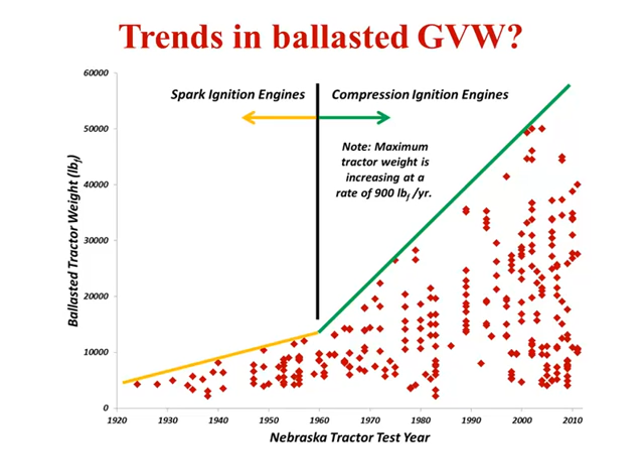We look at the rate of increase in the base weight of tractors tested at the University of Nebraska, and you notice it's a slowly increasing rate right here. What happens in 1960? It takes off. What happened between the 20s through the 60s and 60s on? We went from spark ignition engines, kerosene burners if you will, to diesel.

Look what's happened. Now I'm suggesting to you that if we look at that envelope, the heaviest tractors or the highest horsepower tractors built by John Deere have increased an average of 900 pounds of mass per year, sustained for 50 years. Is anything going to stop that trend? I just showed you a 632 horsepower tractor. Is anything stopping that trend?

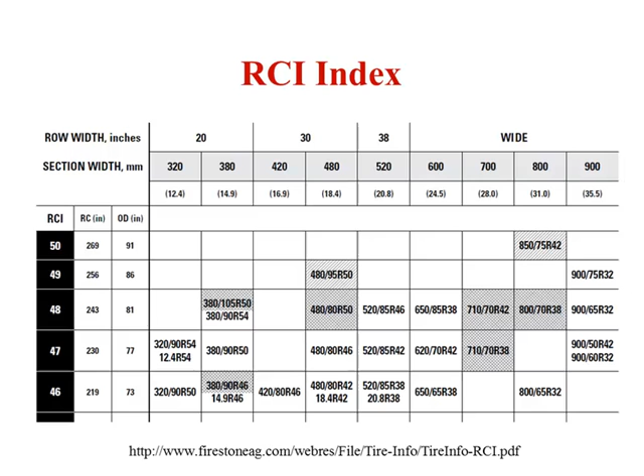Again, is tractor size going to stop increasing? I was up at Firestone Tire - I got to remember it, yeah, hopefully you got the right one. Sometimes I put a lot of different PowerPoints on there, but I was up at Firestone and they were talking about this RCI index, and one of the engineers kind of slipped a little bit and said they're going to build a tire with an RCI 52.

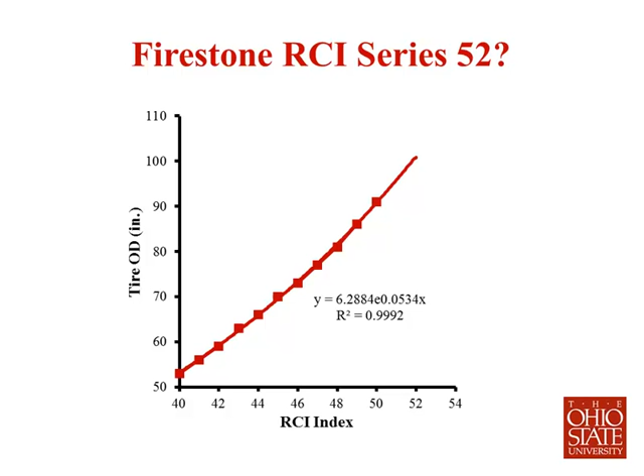I'm an engineer and I get excited about numbers like this, and the RCI doesn't mean a whole lot to you - it's a rolling circumference index, used to match up tires on tractors with front wheel assist. I can go into the technical aspects of it, but he said 52. So I came back and I graphed this - this is the tire outside diameter, and this is the RCI index, and this is what's currently manufactured. They go up to a 50. Now they're going to a 52.

We go up there and hit that and come across - we're going to see a row crop tire. When I say a row crop tire, the width of the tire will fit down between 2 rows of corn. We're going to see a row crop tire 100 inches in diameter. Anybody got a feel for that?

Somebody's getting ready to build a 750 horse tractor. Why would Firestone be building a tire 100 inches in diameter for a row crop application? Somebody's getting ready to build a tractor, 750 horse.

700 horse, I want you to do the math, 120 to 130 pounds of tractor mass per engine horsepower. And how heavy is that tractor? 85,000 pounds? What's the limit for moving goods and services on public highways in the state of Ohio? 80,000 pounds?

How are you going to haul that thing? You can get wide load permits or oversized load permits, but think about that. This is today, I'm not talking about something that's futuristic. This is today. Combines.

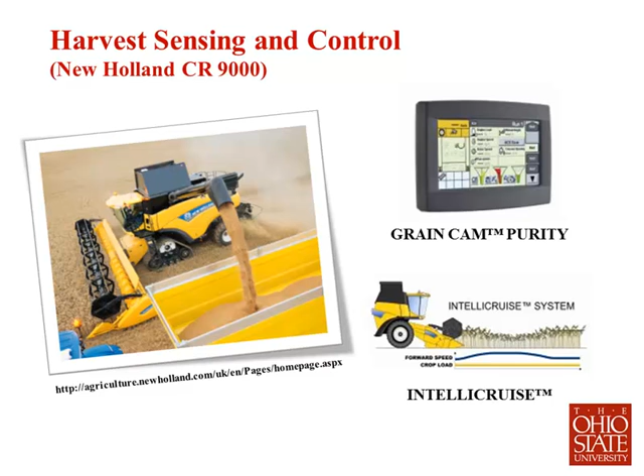One of the things I didn't mention - there was a gentleman from Purdue, one of your counterparts, Howard Doster. You remember that guy? Great man, isn't he? Howard Doster used to talk about farming in combine units. In other words, you got to farm enough ground to cash flow. If you're going to buy a new combine, you're going to have to farm enough ground to cash flow that machine. Howard Doster used to talk about farming in combine units of 3,000 acres. That's when you had Class 7 machines.

You get to a Class 9 machine, how many acres do you need? 4,000, 4,500, 5,000? Think about this. So if you buy a second machine, how many acres do you need? Combine units, okay?

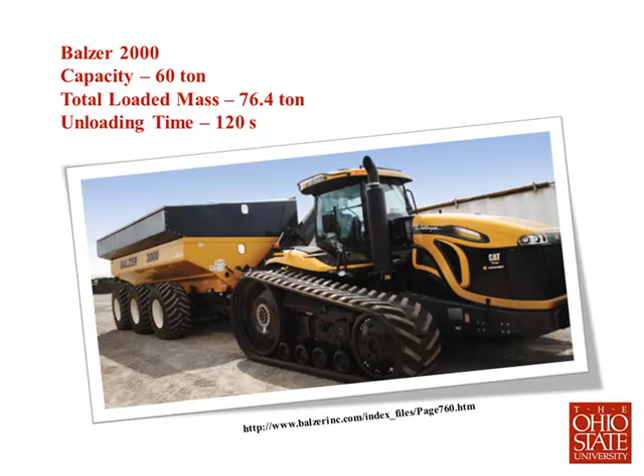When I look at this, can a farmer - let's say this automated control system that's coming, they're all working on it - what's a new combine cost? Anybody had anybody in to borrow some money on a new combine? Oh wait, they're just paying cash these days, aren't they?

You'd get $500,000 tied up in one of these machines pretty quickly if you buy a couple heads for it, a new machine. Let's say this system that's coming costs, round number, $50,000, and it reduces harvest loss by 1%.

Can the farmer afford to pay for that system? Let's see, 1% of $25,000 an hour. How long would it take you to recoup $50,000? A couple of years? All I'm saying is we're going to do things with technology because it's affordable to do so. And as the size of the machine increases, the last thing you want is a human operator making a mistake, because it ends up being a very expensive mistake.

Okay? I don't know where things are going.

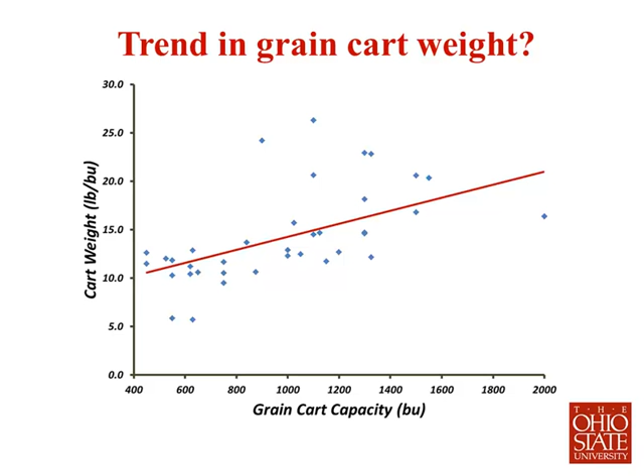Oh, hey, just get a bigger grain cart. I told you that, didn't I? There's three companies making 2,000 bushel grain carts. Think of that. You pull up to the road, you got two tractor trailers sitting there, and you fill both of them. By the way, the unload time on this is 120 seconds. You fill both tractor trailers in 2 minutes.

I was with a group of farmers, and one farmer raised his hand and said, Dr. Shearer, you can't fill 2 tractor trailers in 2 minutes with that. He said, you can unload the grain cart, you just can't get all the grain in the trucks. Think about that. Think about standing underneath the auger and somebody accidentally kicks it on. Unload time, 120 seconds. Wow.

By the way, grain carts are getting bigger necessarily. When you had a 400 bushel grain cart or gravity wagon, the steel required on a per bushel basis wasn't all that bad. But all of a sudden you get out here to 2,000 bushels, you need a lot more steel to support each bushel. So necessarily as grain carts get bigger, they get heavier.

Are we worried about compaction anymore? I submit to you, there was a really neat place: USDA had the National Soil Dynamics Research Laboratory in Auburn, Alabama. Back in the 50s, 60s, and 70s, that lab was in its heyday. They were working on traction, they were working on soil compaction. Back when we had those massive 100, 125 horse tractors, they were concerned about compaction.

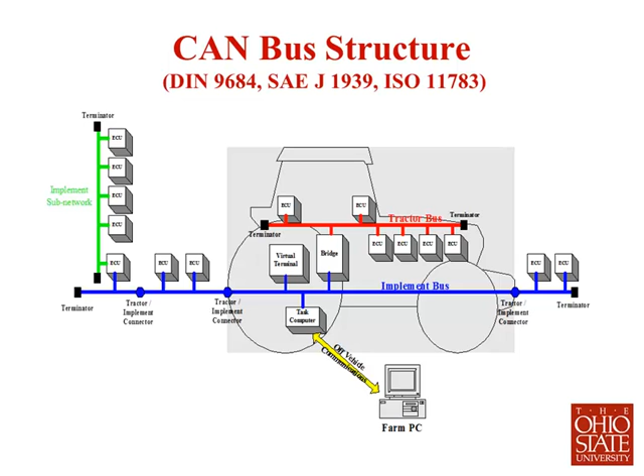Think about that. Here's the example I'll use. I have a good friend farming over in west central Ohio. He had a John Deere 8000 series tractor, farmed with it for 6 years, sold it for $15,000 more than he paid for it. Heard these stories? Well, he goes out and buys a brand new 8R. So the following year he says that 8R is too big to pull his gravity wagons in the field, so he bought a 7R.

This is a John Deere, we're talking large two-wheel drive tractors. And I said, Rick, why are you buying a 7R? He goes, well, that 8R is too big. I said, Rick, how many horsepower do you have on the farm now? The thing you don't know is Rick's farming 450 acres.

What I've been doing and trying to get farmers to do is take the total horsepower they use to farm with and divide by the number of acres. Reasonable numbers for reasonable farmers are somewhere below 1 horsepower per acre. If they're no-till farmers, they ought to be down around a half horsepower per acre. If they're doing tillage, maybe 0.7. When you get farmers that are at 1.2, 1.3, 1.5 horsepower per acre, you've got to ask what's going on.

Now, in Rick's case, he's profitable, got all of his land paid for, and Uncle Sam's going to take part of his money. I never thought I'd say this, but I think Rick views tractors as an investment, because he made money on the last tractor he bought. Has that ever happened in the history while you've been lenders? Farmers buy machinery that appreciates in value? Tell me when the last time that happened was. I don't ever remember it in my lifetime.

Evolving technologies, this is the game changer. Controller area networks on tractors. I'd better see what I'm doing on time here. How much time do I have left, Rory? Oh good, that would be just perfect. I have 45 minutes of material left.

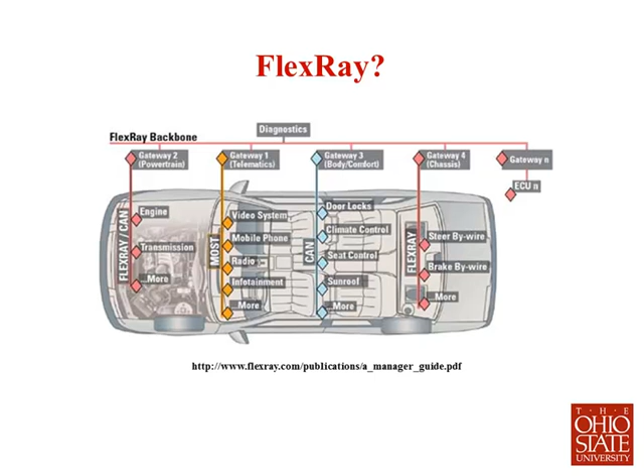CAN bus, control area networks on tractors. There's a bunch of ECUs, electronic control units, on tractors, and they're on an asynchronous bus. There's a lot of jargon and terminology here. What's happening is that tractor can have up to 17 million different unique pieces of data put on that bus, roaming all around it. When you hook up the planter now, you drop the hitch pin in, you hook up the hydraulics, and oh yeah, you've got to hook up the tractor bus too—the computers on the tractor and the computers on the planter. This is changing the way we do agriculture, and I'm going to show you some of the ramifications of it.

In cars now, they've added something called FlexRay. There are communication buses in cars now, and we're going to start having cars talking to cars. Anybody hear about the Google car? What do you know about it? Driverless, 400,000 miles, not an accident yet. Well, there was an accident, but that's when one of the Google employees was actually driving the car.

True story: two engineers from a machinery company go to see the Google engineers. The Google engineers get in the front seat, and the two engineers from the machinery company get in the back seat, and off they go down the road. The Google engineers pull over and say, something's not right, get out, go back and open up the trunk. The two machinery engineers sit in the back seat, the Google engineers close the trunk, and the car starts up and takes off down the road with the two of them in the back seat. It accelerates to about 45 miles an hour. There's a crosswalk, a gentleman walks into it. The engineers in the back seat don't know what to do. The car slows down, the person passes in front, the car speeds up, goes down the end of the road, turns around, comes back to where the two Google engineers are standing there laughing. The engineers from the machinery company weren't too amused.

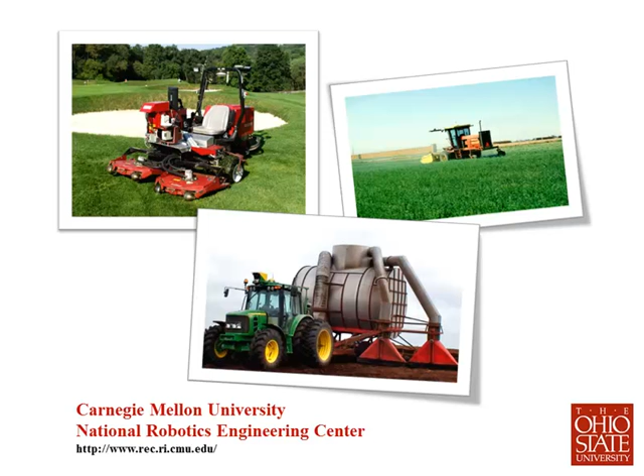Number one user of the Ohio Department of Transportation CORS network: agriculture. 70 to 75% of the load is agriculture. Why did ODOT develop it? They didn't develop it for farmers, they developed it for control of the road network in the state of Ohio. Basically, they developed it for surveyors. I talk about this because this whole infrastructure is evolving, and I'm going to get to the very end.

Did anybody hear anything about Light Squared? This was under ARRA funding, American Recovery and Reinvestment Act. In the Obama administration, what they wanted to do is make broadband internet access available in rural America. But what they were going to do is broadcast it at 1,600 watts, and the problem was that signal was very close to the GPS signals. So effectively, it was going to render all the GPS equipment that had been sold up to date useless. And finally, the FCC stepped in and said, nope, we're not going to allow this to occur. And the machinery companies were relieved.

But what I'm telling you is, probably one of the biggest mistakes ever made by the machinery companies was blocking Light Squared. Light Squared was going to broadcast over here, kind of these two frequencies on this end of the electromagnetic spectrum. They're 1525 megahertz up to about 1560, 1550.

Right here was John Deere's Starfire correction signal. If we look right here, here's the GPS signals, and over here's GLONASS, this is the Russian satellite system. By the way, most of the receivers being sold today pick up GPS, which is the U.S. system, and GLONASS. There's also a European one that's a few years off, okay? But all these receivers now lock onto all these signals.

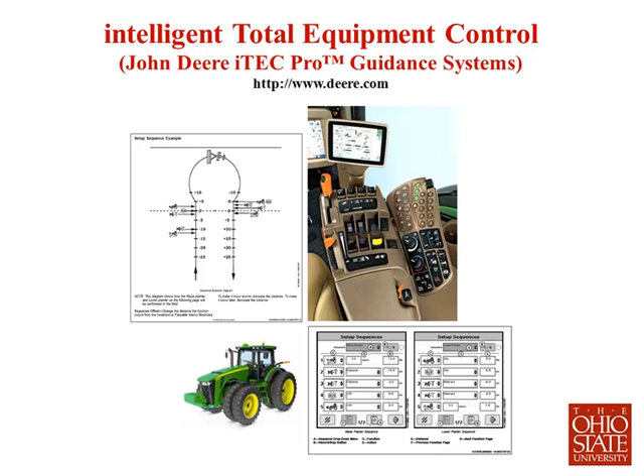There's two of those. This is the Demeter project, CNH, Case New Holland - well, this was New Holland at the time. This mower conditioner would start up, self-propelled, go out and mow and condition a field of alfalfa hay, 40 acres, go back to the barn, absolutely no human intervention. Golf course mowing equipment, fully autonomous. By the way, this happened back in the 1990s.

Some interesting things going on - these are all concepts. This is down in Florida. They're doing a lot of mowing of citrus groves. This was John Deere's concept tractor built on the 5000 series tractor. Bob Recker put that together. Really neat engineer from John Deere. I like the guy, he's a really talented individual.

John Deere R-Gator. You ever seen the Gator for the military? Retail price, $320,000.

Got to see a demonstration of this on the University of Illinois campus. A gentleman from John Deere's Tech Center brought that Gator out and put it on the mall outside the library - I think it was the agriculture library at the University of Illinois campus. About 150 engineering students inside, and the guy from John Deere gets out a little PDA, punches a few buttons on it, sticks it back in his pocket, and says, watch this.

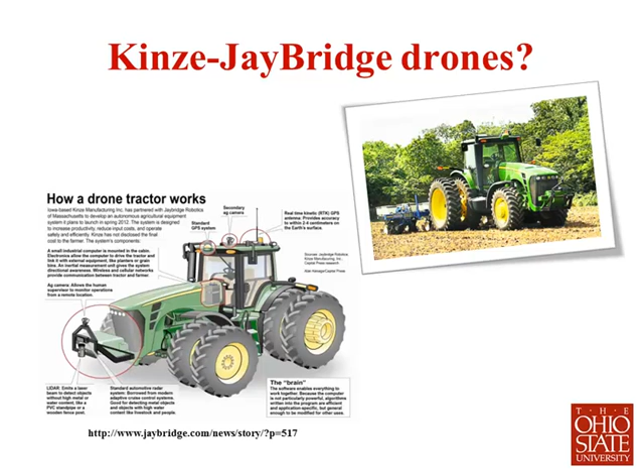Young lady comes running by on the sidewalk. The Gator starts up, gets to follow her. She doesn't know what to do. She runs faster, it speeds up. She slows down, it slows down. She runs off the sidewalk, it runs off the sidewalk. She stops, it stops. She walks towards it, it goes into reverse and backs up. This poor young lady didn't know what to do.

This was basically designed for the battlefield, and there's instrumentation on that machine to allow it to follow a soldier in the battlefield, maintaining about a 30-foot distance between the soldier and the machine. John Deere has aspirations of getting into providing military hardware. One of the things you have to understand is a lot of things from the military translate directly to agriculture. I was just at Wright-Patterson Air Force Base yesterday morning with their sensors group, looking at a lot of the technology out of Afghanistan. There's applications in agriculture - it's coming.

This is John Deere's Intelligent Total Equipment Control System. This was marketed back in 2008, and the reason I show this is I needed to show the YouTube video - it used to be up for a while. What you could do is it's kind of like a macro. Most of you are familiar with a macro in a spreadsheet - you punch a button and all these calculations occur.

In this case, there's all these controls on the armrest, and the farmer at the end of the field has to do a number of things to pick up the planter, slow the tractor down, slow the engine down, turn the tractor around, then do all that in reverse to start planting the next trip. The farmer can record that macro, so turning around at the end of the field becomes a button push. Capability is already on the tractor, has been there since 2008.

Part of it's because of the control area network, or CAN. There's a YouTube video of a gentleman sitting in a lawn chair along the edge of the field drinking what appears to be a refreshing fermented beverage. His tractor comes up, nobody in the tractor cab - this is about 3 or 4 years ago. It comes up to the end of the field, being guided with GPS, turns around automatically and starts back in on the next pass. Nobody in the tractor. Four or five years ago.

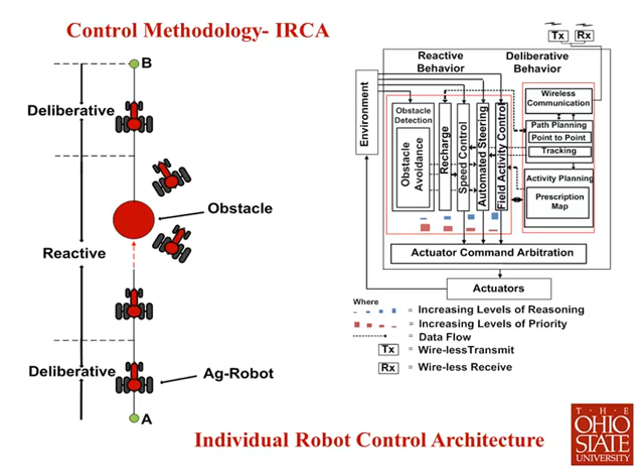This technology's coming. John Deere and CNH both announced products for vehicle-to-vehicle communication. At harvest time, the tractor with the grain cart gets close enough to the combine, takes control of the tractor and drives it during the unloading process. A lot of times the person operating the tractor can't see the grain cart because it's so tall, and it's difficult to load the grain cart evenly. There's now technology coming from John Deere that will allow the combine, in coordination with the tractor, to load the grain cart evenly. It's here, it's today.

Anybody heard of the company by the name of Kinze?

Jon Kinzenbaw, he's from Iowa, isn't he? Yeah, great entrepreneur, fantastic gentleman, and please don't let this get back to him. I don't want to make disparaging remarks about Jon Kinzenbaw, okay?

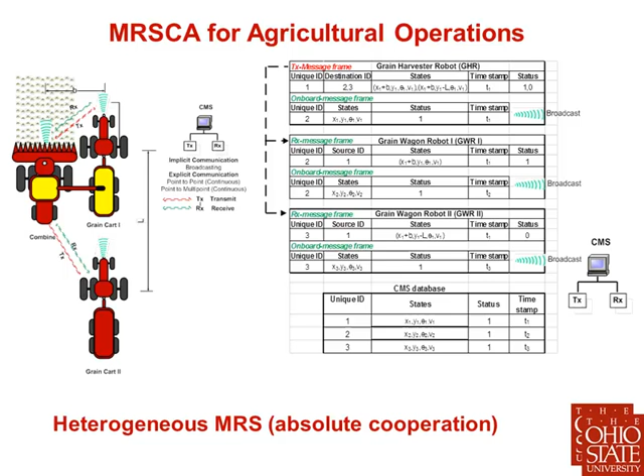Basically, his business, he's a metal bender. He welds metal together and paints it, and he does a really nice job of it. He builds grain carts and planters. By the way, he had a little run-in with John Deere on a patent violation or something, but they finally got it worked out on the courthouse steps with some attorneys.

Jon Kinzenbaw teamed up with Jaybridge Robotics, and now they have a drone tractor that will go out and plant automatically. A metal bender is in the robotics business. That's unheard of, isn't it?

Oh well, Fendt has something called Guide Connect. There's an operator in the front tractor, no operator in the back tractor. You've got one person supervising multiple machines in the field.

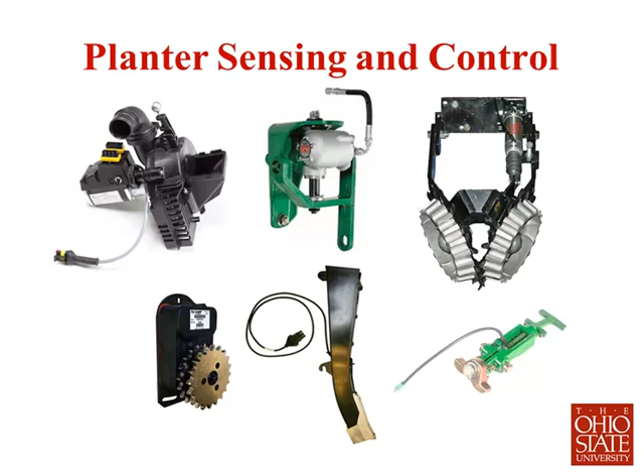Today, John Deere's FarmSight - you need to be paying attention to this. When farmers buy a tractor over 200 horse from John Deere, a combine, a sprayer, or a cotton harvester - we do a lot of cotton in Ohio, don't we? - when they buy those machines, they automatically get a cell phone modem integrated into the bus on the tractor. And that cell phone modem will automatically broadcast data to John Deere's cloud about the performance of that equipment.

Telemetry - everybody has telemetry now, moving data from the machines to the cloud.

John Deere, to demonstrate this, had a farmer who just bought a new 8R tractor out in the field - I think the farmer was in the middle of Illinois. He gets a call from a young lady in Des Moines, Iowa. She says, 'Sir, could you please stop your tractor and check the hydraulic reservoir?' He says, 'I checked that before I started, I'm okay.' 'Sir, we advise you to stop your tractor and check the hydraulic reservoir level.' 'Ma'am, I just checked it before I started.' 'Really, sir, you ought to stop and check your reservoir.'

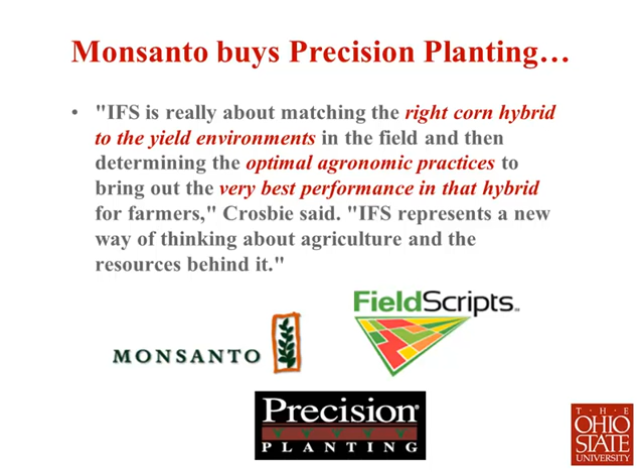He got out of the tractor - there was a hydraulic hose that broke, and he'd been pumping hydraulic oil out into the field. John Deere recognized it before the operator of the piece of equipment did.

Think about where things are headed. There are identifiers that'll tell you on the bus - it'll tell you when the cab door opens, when the tractor's parked, when it goes out of a geographic fence.

Going forward, you'll love this one. This is what we're doing at Ohio State, because you know I've got to have a research program. I just can't go around talking about it. Well, what it really means is I've got some graduate students back there doing the work.

We're working on control systems for fleets of vehicles. What we're trying to do is give the tractor intelligence - that's what the tractor's missing right now. You've got to have a human operator on there because you need intelligence.

But we can set an A/B line, and using GPS, we can guide the tractor automatically. There's kind of a deliberative mode.

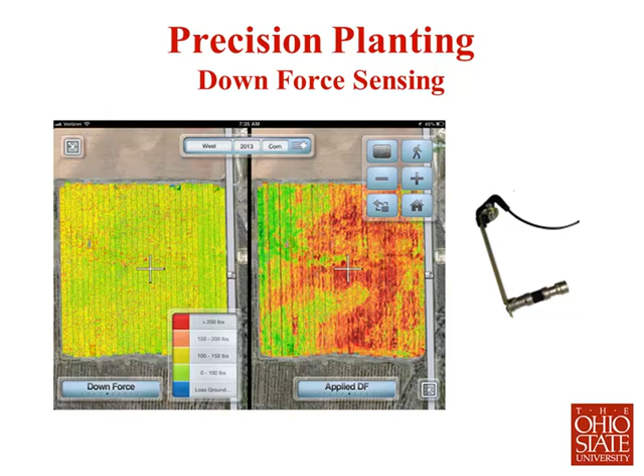It's going to drive from point A to point B, but maybe there's an obstacle that occurs out in the middle of the field. So along here it senses an object and it goes, 'Oh gosh, I've got to do something.' Now maybe that's a rock, maybe that's a tree, maybe that's something that's immovable, and the decision is, hey, just go up here and drive around it.

I want to try to give you a feel for what's going on in the industry in terms of liability, okay?

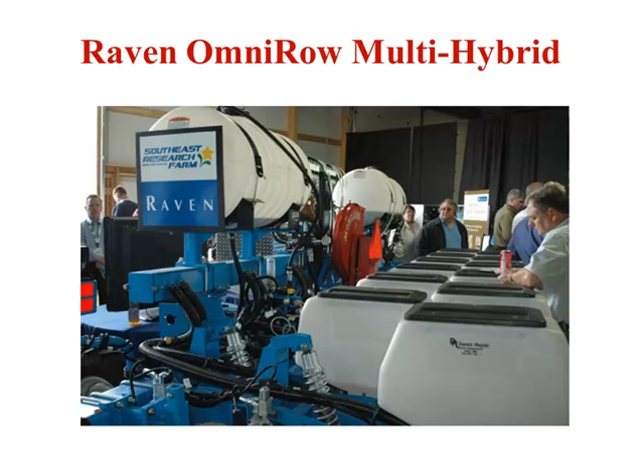What we're trying to do is guide fleets of vehicles. So we're not just worried about the combine, we're not just worried about the grain cart.

By the way, I think that's unloading on the wrong side, isn't it? Did you notice that? Maybe I need to do a mirror. We're worried about the grain cart that's coming up behind to be filled or loaded next.

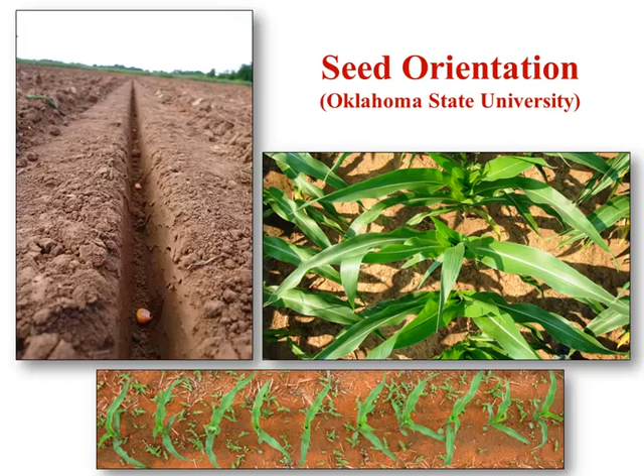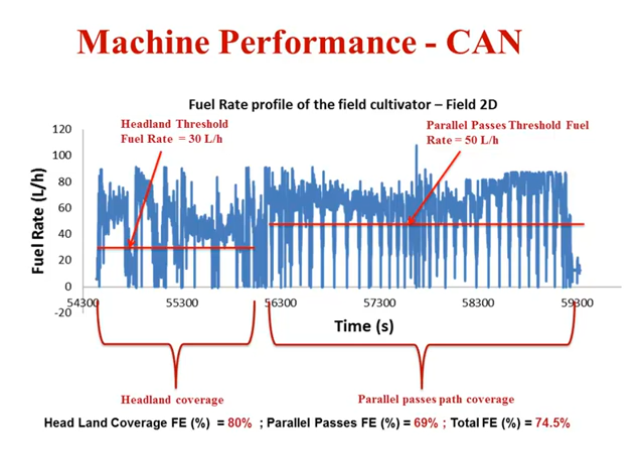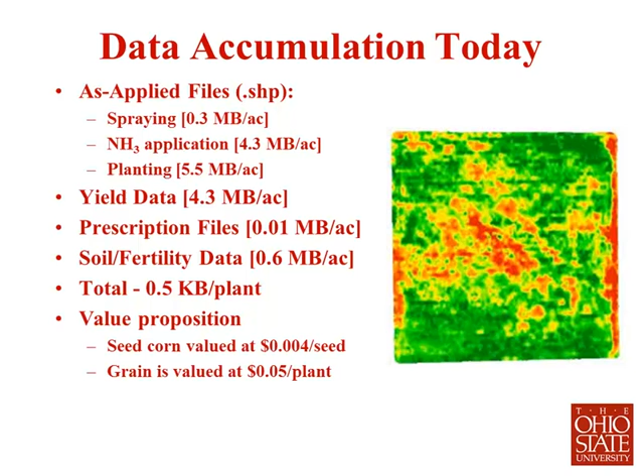Planters. Man, it used to be you just went out and bought a planter. Today you've got so many decisions to make. The controls on planters are really out of control. Literally, farmers now have the option of putting up to $2,000 worth of controls on each single row unit. You buy a 24-row planter, you might have to spend another $50,000 on sensors and controls for that planter. It's here today, and I'm going to tell you why and where it's headed.

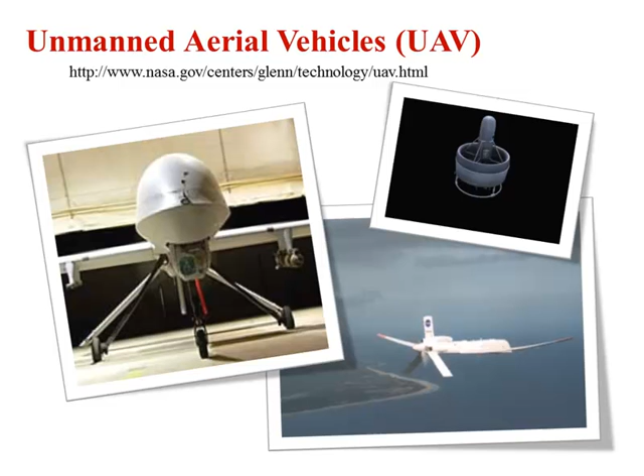Monsanto. What are they known for? That evil corporation, Roundup Ready. They're known for plant genetics, aren't they? Some people think they produce seed, but they discover things and it gets integrated into seed. They own some seed companies too, but really their forte is genetics and development, genetically modified plants. Last year they bought a company called Precision Planting. Used to be the machinery companies did their thing over here, genetics companies did their thing over here. Now all of a sudden those two worlds have collided. Monsanto realizes the full genetic potential of their plants can't be realized unless they begin to take control of the planting process.

Interesting. By the way, I think they overpaid for Precision Planting, but it's a neat company. Precision Planting makes a lot of those products I just showed you for add-on to the planters.

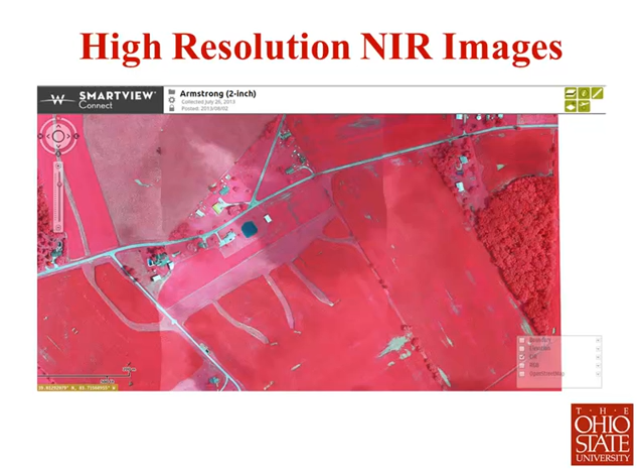Wall Street Journal, October 2nd of this year: Monsanto spends $930 million for Climate Corporation. All that company does is archive and analyze weather data. $930 million. I think they overpaid for that company too.

Where's Monsanto going? What's all this information so important for? You know, farmers used to do what's called monoculture - we planted one crop, one variety, in a field at a time. What Monsanto is moving us towards is polyculture. Monsanto is making the statement that in cornfields, farmers might be planting up to 5 different corn hybrids within that field and matching those to the soil landscape.

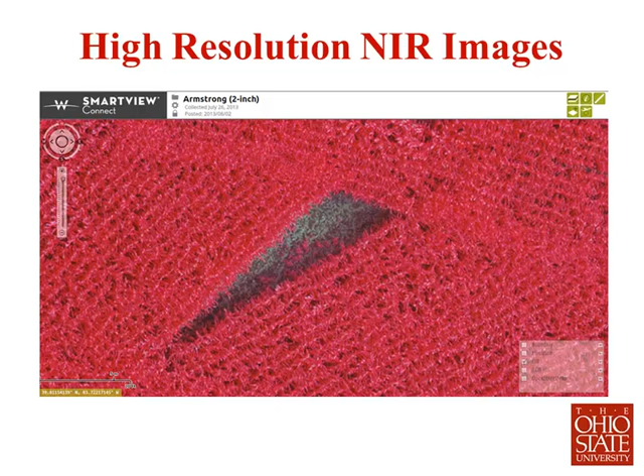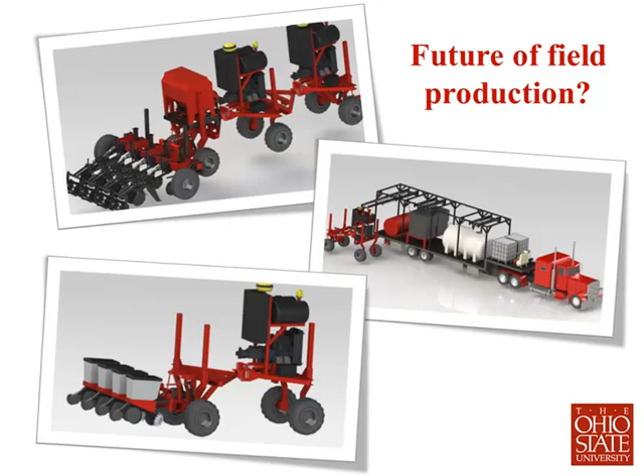I'm making projections right now that for corn and soybean production in the U.S., we're about 2 petabytes per year. It's big data. Monsanto would love to have all that data too, because that will help them match up some of their plant genetics with what's going on in the country. If we throw in remote sensed imagery, worldwide that could go to 500 petabytes a year. I jest with this, but used to be I kind of thought I knew what a million was, and then the federal government started talking about billions and trillions. Now we're talking about petabytes. That's a lot of information.

One of the big things they're working on is drones, and everybody's concerned because of privacy. They're flying a lot of those. A company right outside of Dayton, Ohio, Woolpert, does a lot of work - they've done all the LiDAR imagery for the U.S. They have 7 planes that they fly. They put this drone together. It's about a $150,000 fixed wing aircraft, has about a 7-foot wingspan, and will stay aloft for about 45 minutes.

What they're able to do with that is capture imagery over agricultural land. Now, they can't fly it commercially now because the FAA won't let them. Now, if I was a hobbyist, I could go out and fly that. I'm trying to understand the logic.

This was actually flown with a manned aircraft over the Farm Science Review and some other places, but this is some near-infrared imagery they collected. What I want to show you is the resolution they're getting. If you zoom in on that, that's about 2 inches per pixel at the ground surface. What's that mean? Woolpert was showing me in Dayton, Ohio, after flying a farmer's field shortly after emergence, they were able to do stand counts on the corn plants in that field.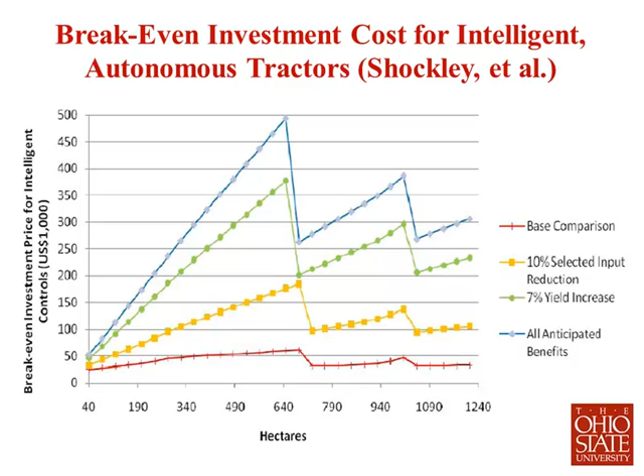This is technology that's available and ready to go today. The only thing that's keeping it from happening is the FAA. The cost to farmers for this imagery - Woolpert's cost for generating it and providing it within about 24 hours, they're saying 72 to be safe - is about $1.70 an acre at 2 centimeter horizontal resolution.

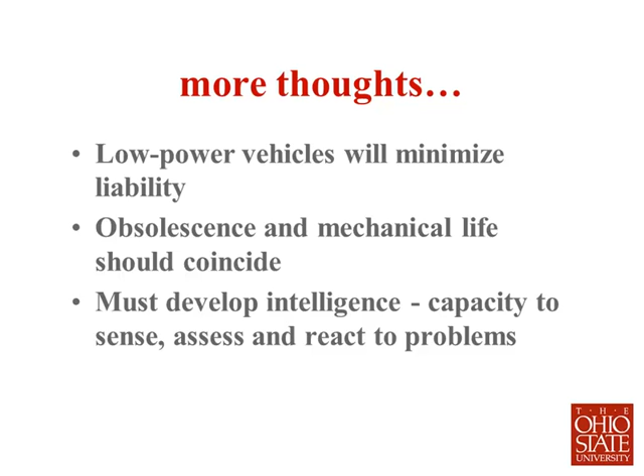One of the things I start talking about is, what about data analytics and crop insurance? Right now, crop insurance is backed by the federal government. Do you think we're going to see a transition to a market where the federal government no longer backs crop insurance? What I keep thinking to myself is, if I was a crop insurance company, I'd certainly want to know what the stand was that the farmer achieved. Because if their stand was 50 or 60% of what was necessary, I don't know that I'd be paying off fully at the end of the season for drought conditions that occurred later in the season.

By the way, what's going to keep - when the FAA releases some of the restrictions they have on drones - what's going to keep insurance companies from flying a farmer's field? Anything? Have you been on Google Street View lately? You check out what's in your garage? They are covering up license plates now.

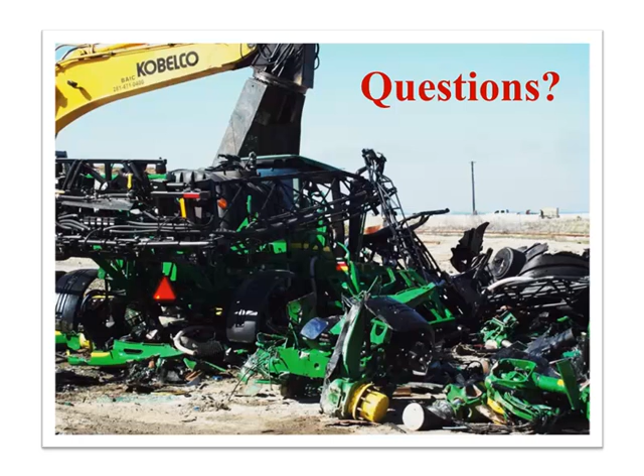I'm going to quickly bring this to a close, but I put this up for a specific reason. We're having a recovery in this country, and a lot of people characterize it as a jobless recovery. One of the things we know about industry is spending on automation is up 30 to 40% since 2008. We're actually bringing manufacturing back to the U.S. right now, but it's through automation. And this is perhaps the best example of this, and kind of goes...